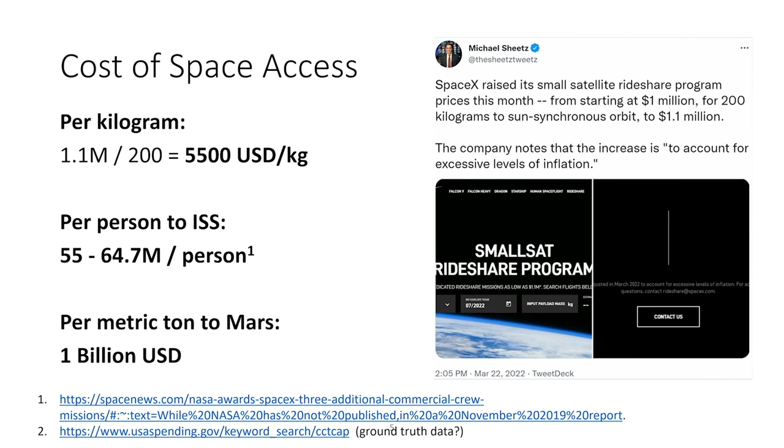The first business is sustainable space launch. So we have some good data already on how much it costs to go to space: $5,500 US dollars per kilogram. This is data from 2022. It also costs about $55 million per person to send something to the ISS, $1 billion per ton to send something to Mars. Now, we're doing this today with rockets, and rockets are a very well-established and mature technology, but there are still some innovations in the pipe. For example, SpaceX's Starship.

So the idea here is that with a linear motor placed inside an evacuated tube, you can accelerate a spacecraft up to orbital speeds. Now, the problem with doing that on the surface of the Earth is that when the vehicle exits your tube at orbital speeds, it will simply burn up in the atmosphere like a meteorite in reverse. But if you can place that tube at the edge of space in the stratosphere, then this idea becomes technically feasible. By the way, the cost of doing this drops to $2 per kilogram rather than $5,500.

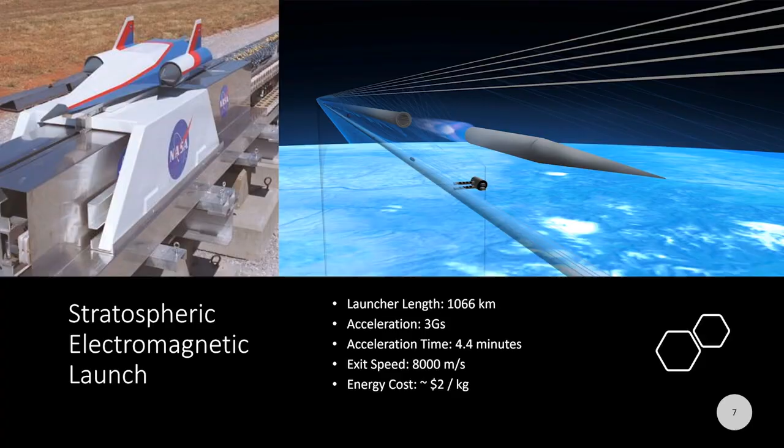Now, the usual argument against building any kind of expensive infrastructure is that there's not enough demand to justify it. So you look at this curve, which is an example of how people would make this argument. They would say that it would take, say, $110 billion to build this electromagnetic launcher before you get anything off the ground. Whereas if you use a program like Commercial Crew to make rockets more cheaply with the commercial industry, it costs about $8 billion, and then you're starting to get things flying off the ground.

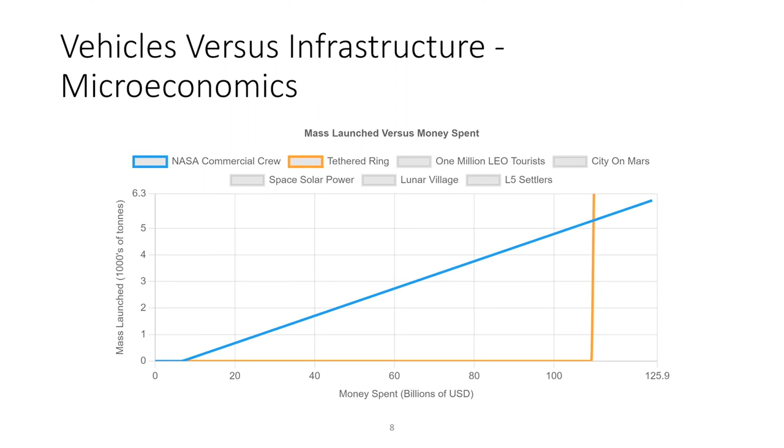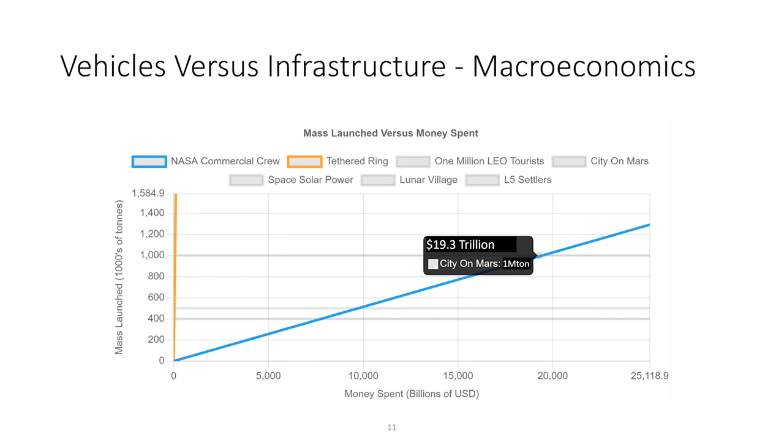Now, this is great for small markets, but if you look at humanity's aspirations to, for example, set up a self-sustaining city on Mars one day, that's going to take 1 million tons sent to Mars. So we need to walk our way up this blue curve until we get to 1 million tons on the y-axis here, and then look across to see what the cost is. The cost is $19 trillion. Despite the high upfront cost of infrastructure, the infrastructure approach is far, far cheaper. In fact, you'd be saving something like $19 trillion if you built a tethered ring and put an electromagnetic launch system on it. Now, you may be asking at this point, what is this tethered ring thing that will save me $19 trillion?

But what was very interesting about coming up with an answer is that then we had to re-examine the question and to see what kinds of questions that answer would provide an answer to. And some of those answers turned out to relate to sustainability and transition to a carbon neutral economy.

So I mentioned it was a patented technology. What this means is the US Patent Office assigned some subject matter experts to study the invention, and they concluded that it was new and non-obvious and that it has utility. But I wanted to help you visualize this idea of a tethered ring.

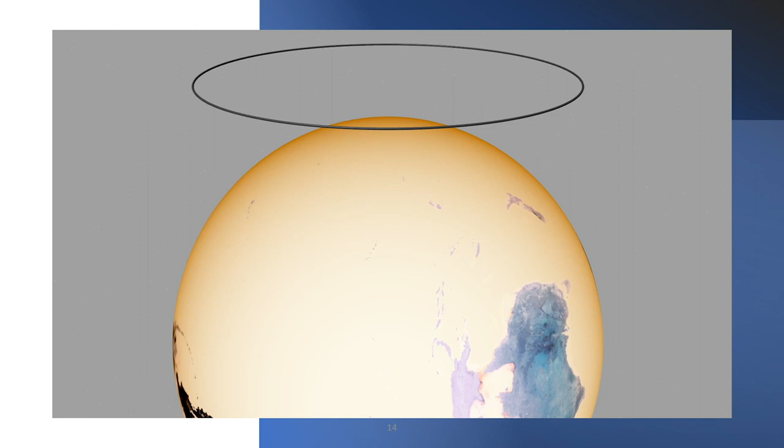So for a moment, just imagine you have a globe, and you turn the globe so that the Pacific Ocean is at the top. And then take a steel ring and place it on the globe, like I'm showing here. And then attach tethers, or let's imagine these being pieces of thread, between the steel ring and points above the steel ring on the surface of the globe. Now you could imagine that if you could tighten up each of those tethers, like tightening up the spokes on a bicycle wheel, you could lift the steel ring off the surface of the globe, by a few millimeters perhaps.

But this won't work on the scale of the real Earth. What would happen is that steel ring would collapse like a rubber band at the scale of the Earth. So to prevent that, what we have to do is replace the steel ring with a pipeline. And on the inside of the pipeline, you have to put a maglev track, and they have to support another ring. And that internal ring has to rotate.

Now, the rotating internal ring will generate outwards inertial forces. And those are represented here by these red arrows. So these inertial forces prevent the ring from collapsing when you pull it up with the tethers. So essentially what's happening here is the inertial forces are balanced against the tensile forces of those tethers to offset the forces of gravity, which are shown by these green arrows.

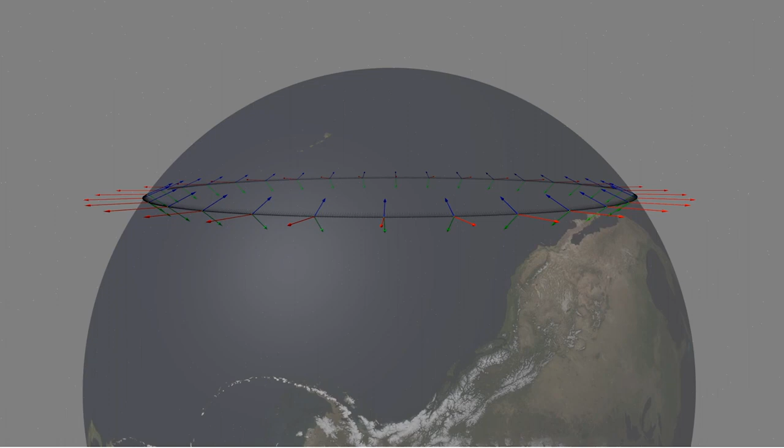The tethers should be forked so that they distribute their tensile force around the ring evenly, and they would tend to sag under the weight of gravity. And the steel ring doesn't have to be as thick as we've shown it here. It can be much thinner, and it doesn't have to be as high off the ground. So it's actually quite close to the Earth. It's about an altitude of 32 kilometers where it would be useful.

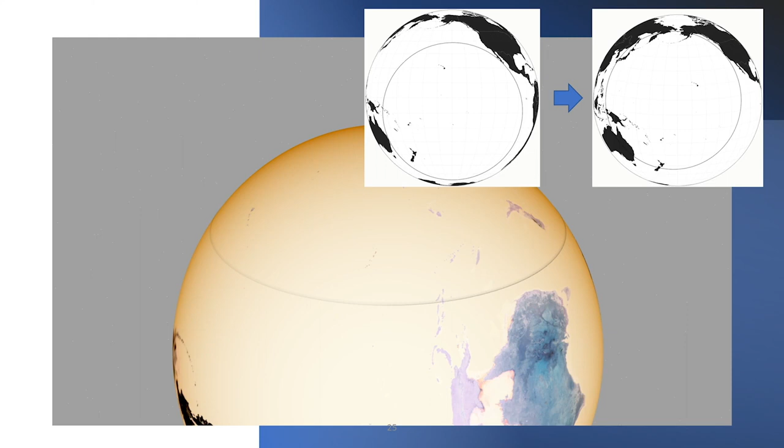So this is kind of what it would look like on the globe. Initially, you can build it in the Pacific Ocean, but then you can move it to a place where it would be more useful, so you don't have to leave it there. The example I'm showing here is we build it in the Pacific and we move it up northwest in order to place it over New Zealand, Australia, Western Asia, or Eastern Asia, and Western United States, Canada, Alaska.

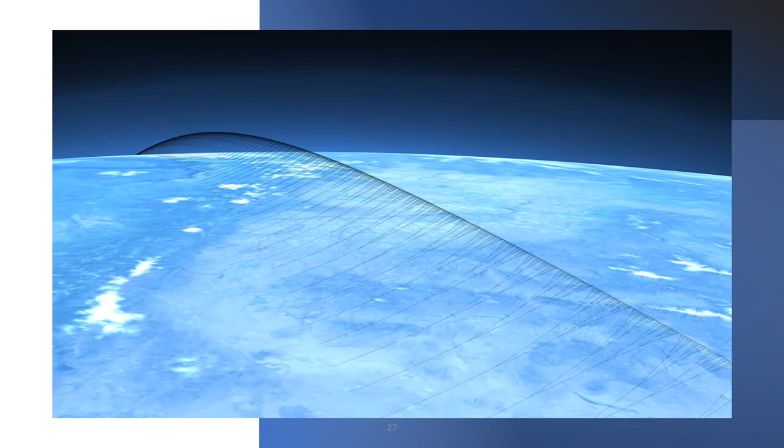This is what a tethered ring would look like from space if you could put lights on it so you could see it. Without lights, you wouldn't be able to see it. This is a close-up of the tethers to show how they fork. And this is a rendering of the tethered ring in Google Earth, so you can get some landscape.

Okay, transitioning from technology back to business models. A key challenge with any infrastructure project like this is you need to make the case that it will generate enough revenue or enough value to service the debt that is incurred to build it. And to that end, we've been working on a variety of business models, and I'm going to show you 3 of the interesting ones today.

The first relates to something we were talking about earlier today, carbon neutral international travel. Today, this is a business that's serviced primarily by subsonic aircraft. Now, these aircraft are hard to make carbon neutral. For example, lithium-ion batteries are not energy dense enough to electrify these kinds of vehicles. So that's not really a great solution so far.

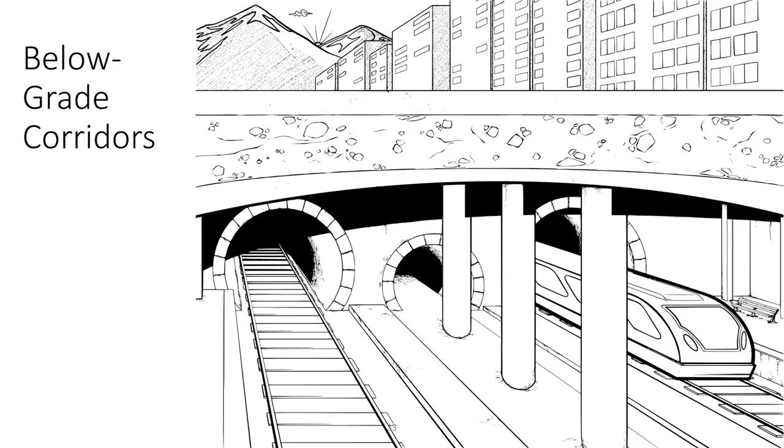Another possibility is high-speed electrified trains. But the problem with trains is their corridors are expensive. These corridors fall into 3 categories. There's on-grade corridors, there's below-grade corridors, and then there's above-grade corridors. In each case, there's reasons why these corridors tend to be expensive in practice.

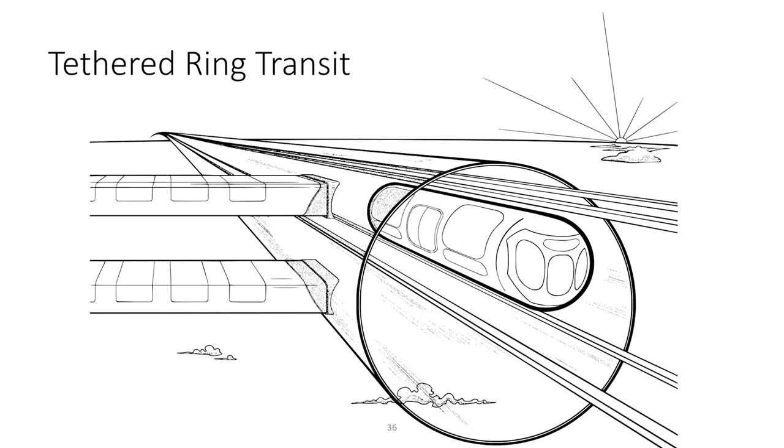The individual vehicles are small, like business jets, and they depart frequently, they're very fast, and they're autonomous. They travel on maglev tracks, and they don't have heavy components like wings, engines, fuel tanks, and landing gear. And they can't be hijacked. So the security for riding one of these will be more like train station or subway security than airport security.

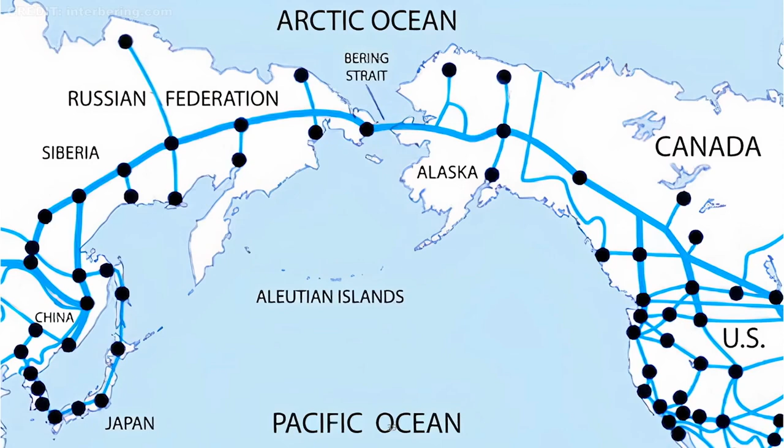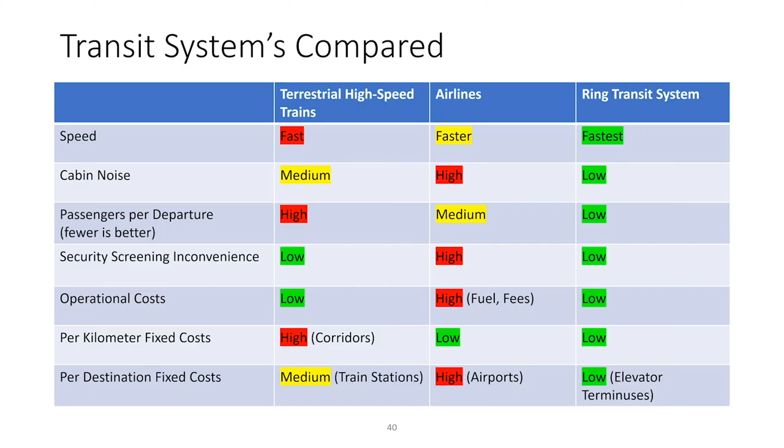All right, next I want to move on to an interesting business model that people might not realize is a potential option: solar power generation, storage, and transmission. The idea here is simply to mount solar panels up on the tethered ring. Now, why would you want to do this? Well, they'd be more efficient up there. They're above the clouds. They're above 99% of the atmosphere.

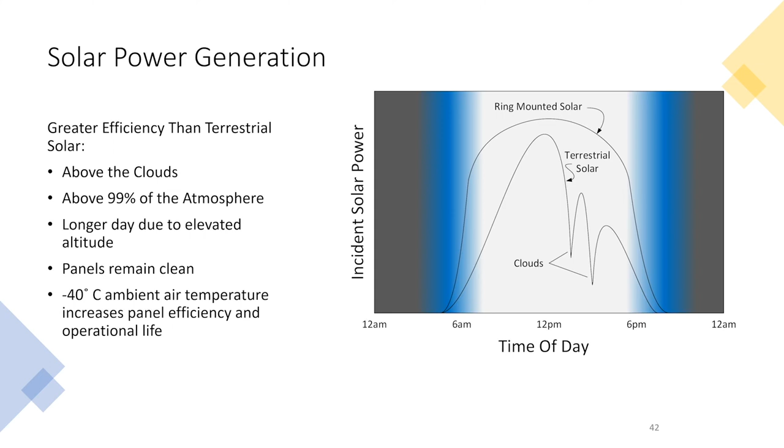They don't accumulate dirt up there. They get full power from sunrise to sunset because they're so high up. They can see right to the horizon. They don't get blocked by mountains. And because the ambient temperature up at the ring is about minus 40 degrees, the solar panels are far more efficient and they last longer because of the cool air.

But whenever you have renewable energy, you're also dealing with intermittency issues. So you need storage to reconcile the supply and the demand. What's interesting about a tethered ring is that the moving ring I mentioned earlier stores a lot of kinetic energy, about 58 terawatt hours. You can add power to the ring by speeding it up a little, you can take power out, and you can put power in one place and take it out in another.

If you take just half of 1% of that energy and use it for time-shifting renewable energy, that's worth a lot of money. In fact, the storage value of that little shifted energy is equivalent to about $635 billion worth of lithium-ion batteries, not including the recycling costs. That alone would fund the tethered ring more than 10 times over.

The next model is real estate and tourism. The idea here is to install habitable floor space for perhaps about 250,000 people up on the ring. That sounds like a lot of people, but think about airplanes. They support 750,000 people up in the air at any given time, so 3 times as many. The advantage of real estate up on a ring is that it's very high quality premium real estate, and you can sell it before it's built. You can sell pre-construction real estate. Lots of other interesting projects have done this. So it's a source of early funding.

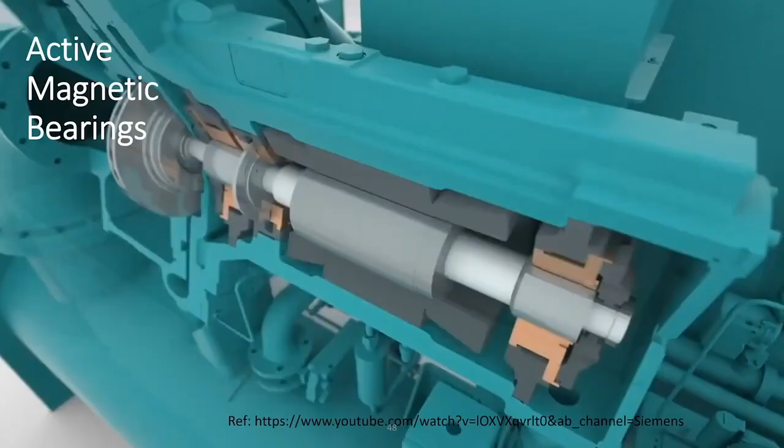All right, now I'm going to switch back and talk about technology once again. There's 2 things I wanted to talk about: heritage technologies, which are basically technologies that supply technology to the tethered ring, and capital cost. Let's start with heritage technologies. The first of these is magnetic bearings.

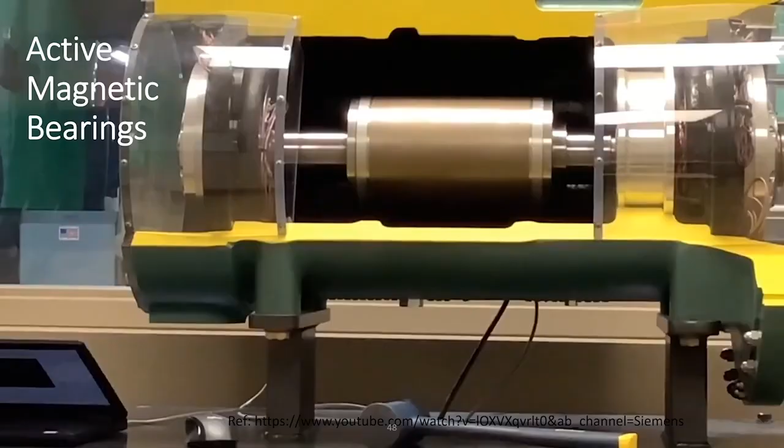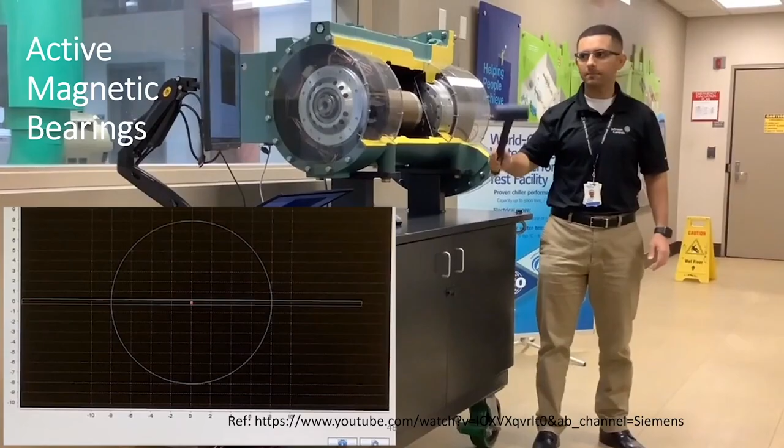Magnetic bearings are used in lots of industrial applications because they last longer and end up costing less than traditional mechanical bearings. This video shows a shaft supported by magnetic bearings being hit by a hammer. You can see the computer system quickly adjusts the magnetic fields to keep that shaft from going off center. This is very much like the system that would support the spinning ring inside a tethered ring. Another heritage technology is carbon fiber. The tethers in the tethered ring are made of carbon fiber.

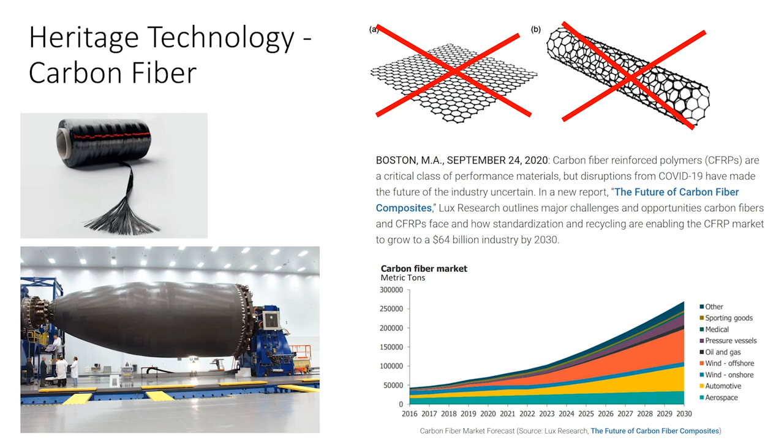Now, carbon fiber is not graphene and it's not carbon nanotubes. It's an industrially produced material today. The cost is coming down rapidly and the manufacturing capacity is going up exponentially. And there's a figure of merit for this tethered ring, and that's the cost per kilogram that it supports. So you can make any size or any mass tethered ring you want, but it really comes down to this metric. This graph shows what that metric is.

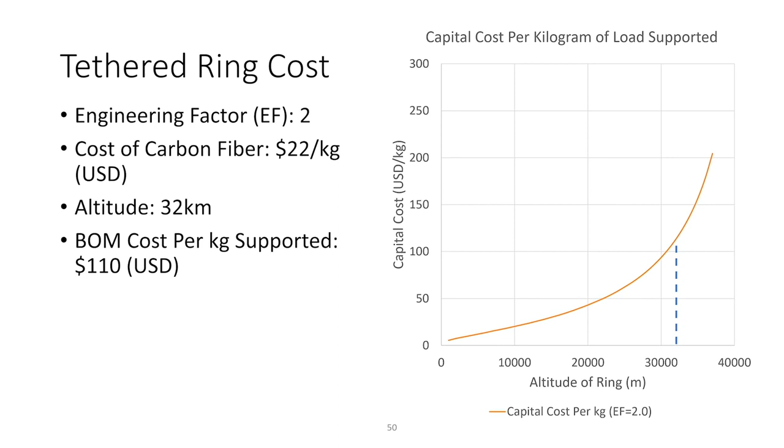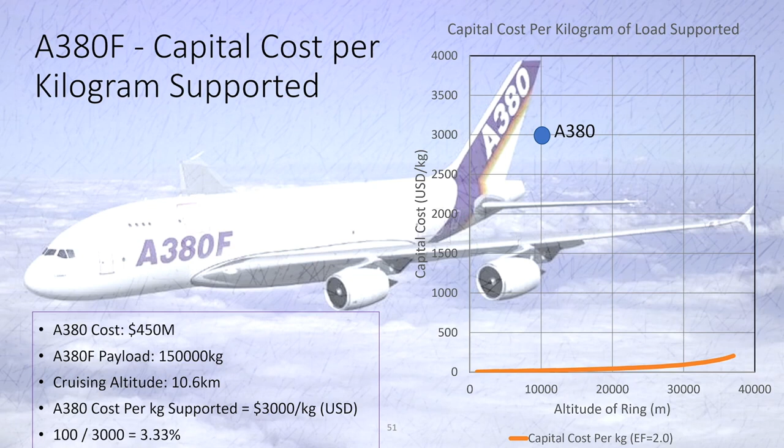Basically, our reference design is the 32-kilometer high tethered ring. So at 32 kilometers, the cost per kilogram supported would be about $110 per kilogram. Now, to put that in perspective, an A380 has a cost per kilogram supported of about $3,000, and it only supports things at 10.6 kilometers. So this dot is about 30 times higher than this point here on the curve. So our tethered ring is about 30 times cheaper than airplanes at supporting things up in the stratosphere. So it's more like a building than a plane.

So next, I want to talk about some incremental steps. Some people have said, I can believe this is a technically feasible idea. I can believe this is an economically feasible idea, but it seems like a giant leap for mankind to go from where we are now to having built one of these things. It's a huge project, right? So let's talk about that.

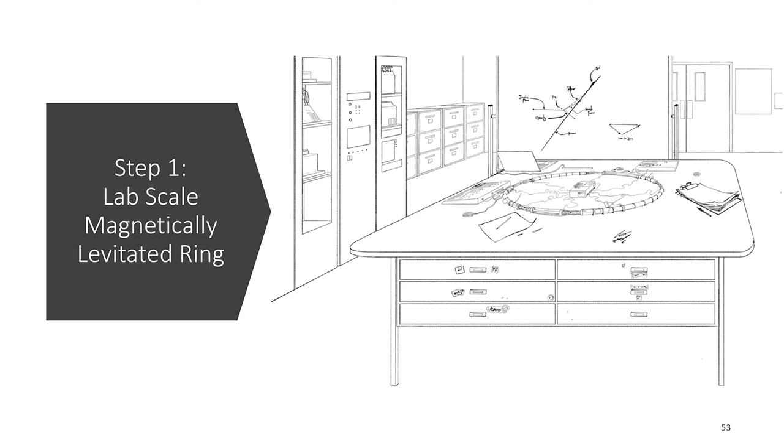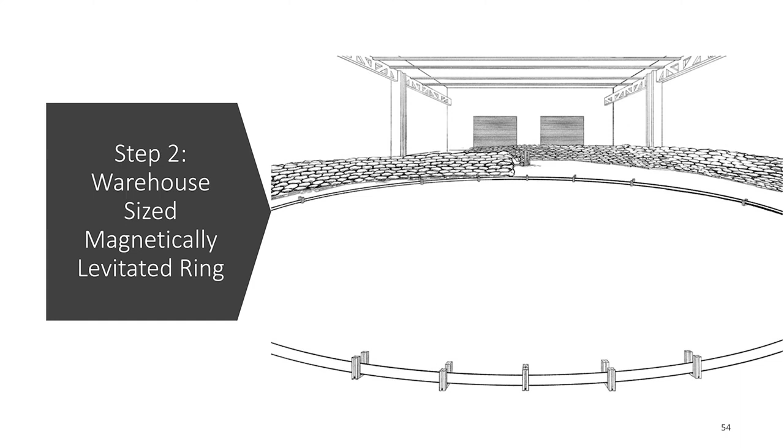The first step would simply be to build a magnetically levitated ring in a lab and experiment with it, and then you would move on to a larger scale project where you'd actually put a larger ring in a warehouse. It might be a little bit more dangerous. And you'd also start experimenting with manufacturing techniques to see if you could make this ring cheaply. And then you would go to a demonstrator project where you actually connect a magnetically levitated spinning ring to an electric grid to see if you can time shift energy with it.

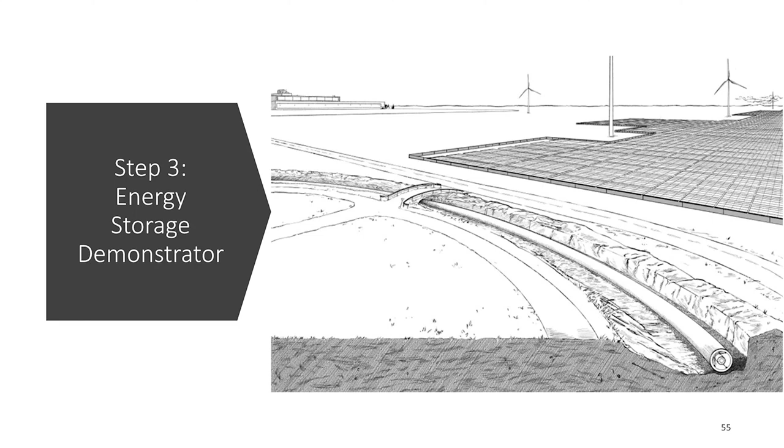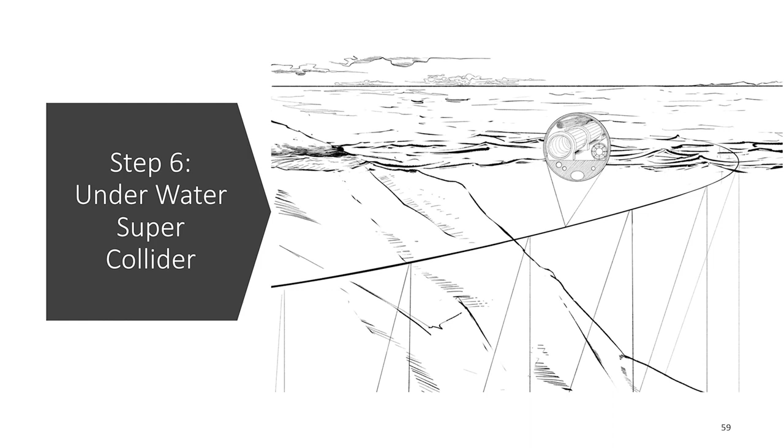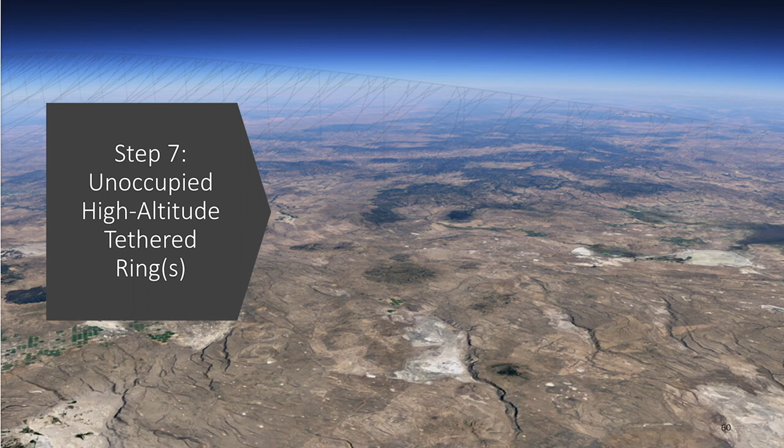The next step after this would be perhaps to partner up with the particle physics community and build an underwater particle collider. And then we would hopefully at this point be able to jump to the first full-scale tethered ring, but this would be an uninhabited version. It would support the solar panel and the storage ideas. It might support cargo space launch. You could put communications gear on it, for example.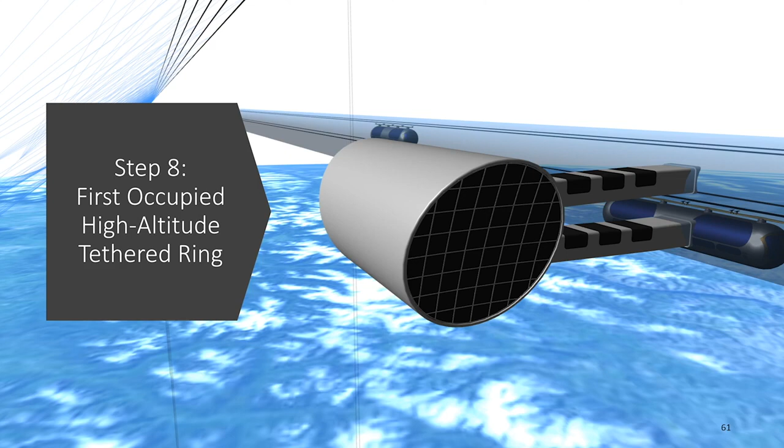And after that, you would go to the full-scale inhabited model where you'd support the transit systems, human-rated space launch, and you'd create that habitable floor space where millions of people could go to look down upon the Earth and see the planet from a new perspective. So I hope I was able to convince you, or at least a few of you, that developing space infrastructure will not only help us transition to a carbon neutral economy, but it will also enable human civilization to expand out into the solar system.